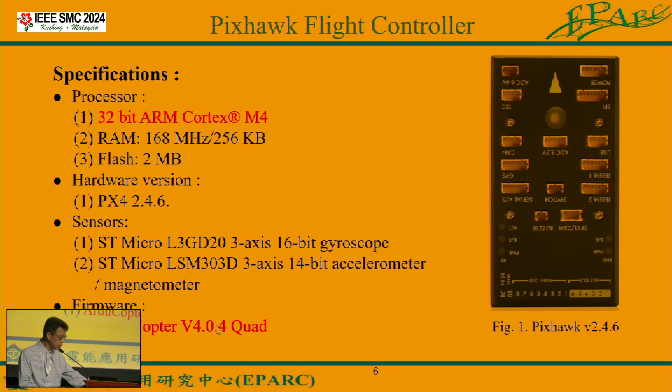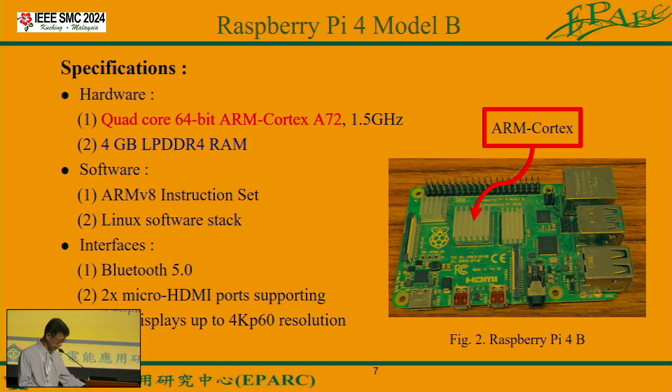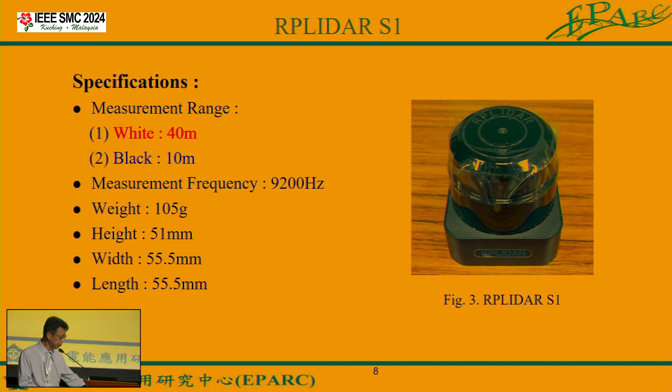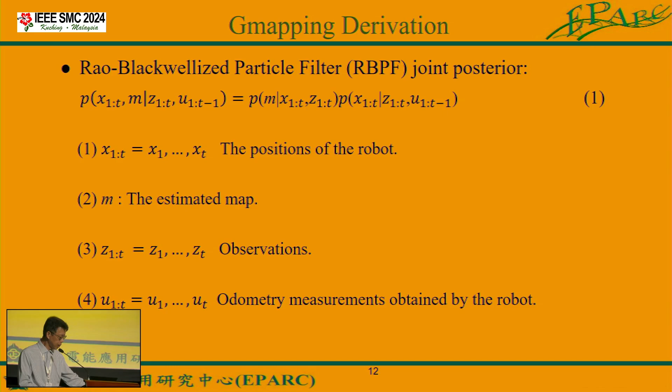In this algorithm, we have two models. The first one is the observation model. The second one is the motion model. In the motion model, we can use a particle filter to estimate the motion. Each particle represents a potential trajectory of the robot. In the observation model, the maps are built from the observations and the trajectory represented by the corresponding particle.

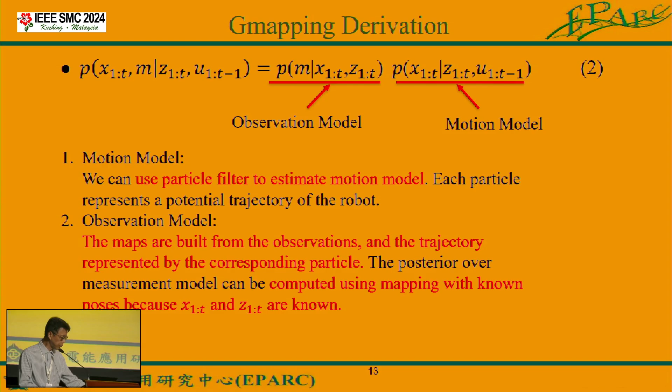The posterior over the measurement model can be computed using mapping with known poses. In general, the weighting of the proposal distribution is not the same as the target distribution. If the proposal distribution is the same as the target, the weightings of the particles are all equal.

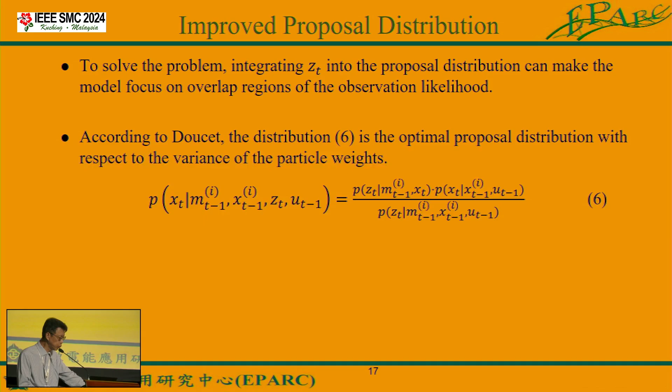To solve the problem, integrating z_t into the proposal distribution can make the model focus on overlap regions of the observation likelihood. Based on equations 5 and 6, we can obtain the computation of the weightings.

Next, we will show the scan matching algorithm. The scan matching algorithm is used for matching the data between two scans, and it helps SLAM figure out the real-world position and the scan from sensors. In G-mapping, the iterative closest point is used as the scan matching algorithm.

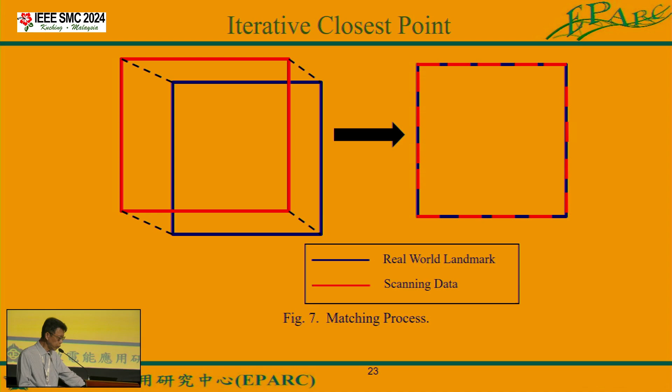This figure shows the matching process. The blue line shows the real-world landmark, and the red line shows the scanning data. The key idea of ICP is that if it knows the correct correspondence, the right relative rotation and translation can be computed in closed form. If the initial points q_i and p_i were not close enough, the result would be divergent.

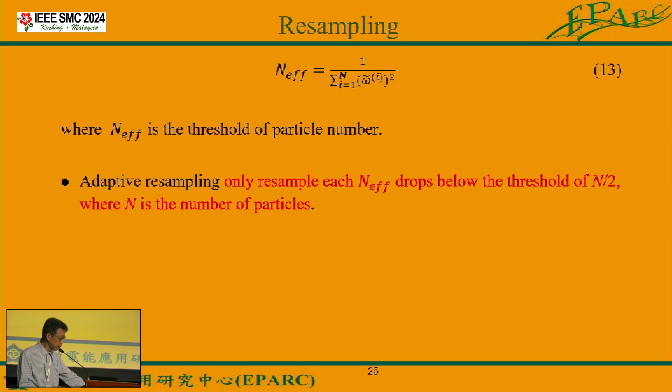Adaptive resampling only resamples when the effective particle number is below the threshold of n divided by 2, where n denotes the number of particles. For each particle, the corresponding map estimate of the observation model is computed based on the trajectory of that sample and the history of observations.

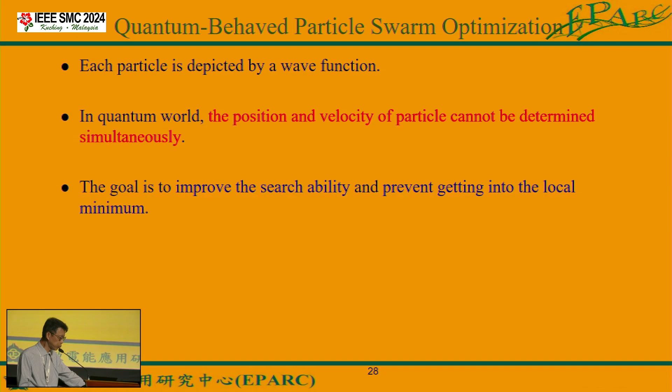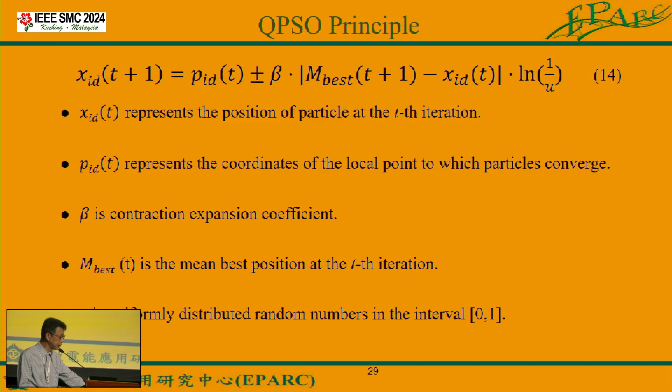Next, I will show you the quantum behaved particle swarm optimization idea. First, each particle is depicted by a wave function. In the quantum world, the position and the velocity of a particle cannot be determined simultaneously. The goal is to improve the search ability and prevent getting into local minima. Based on equation 14, we can obtain the position of the particle at the next time.

And in equation 15, m best denotes the mean best position at the t-th iteration. And equation 16 denotes the position of the particle, based on the local best position and the global best position combination.

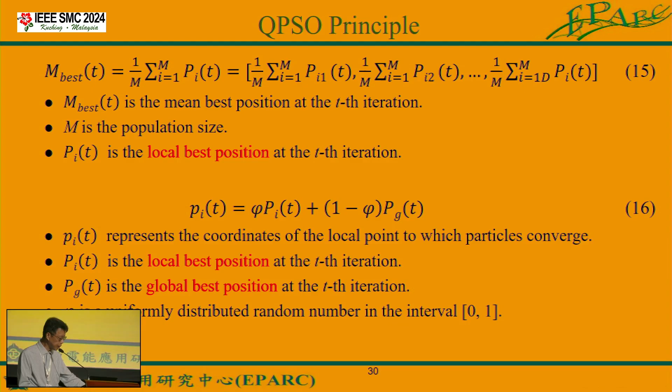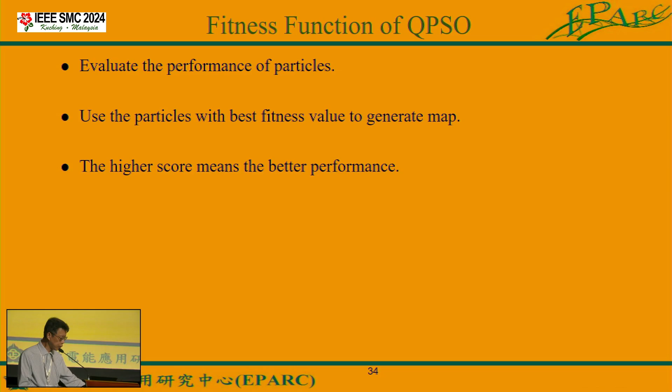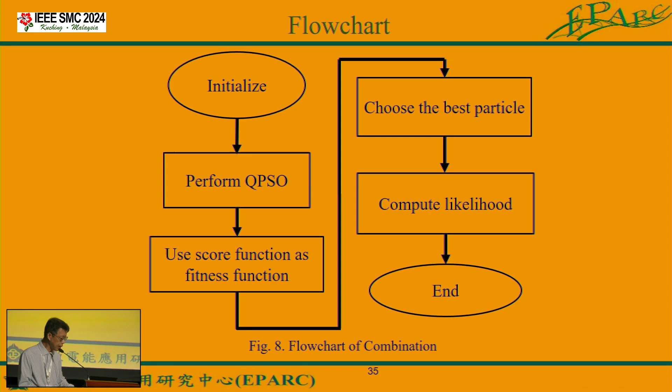And we define the fitness function of QPSO. So first, particles' performance will be evaluated, and we use the particles with best fitness to generate the map. The higher score means the better performance. So figure 8 shows a flow chart of the combination algorithms. We combine the QPSO and the G-mapping algorithms. And the next will be the G-mapping on ROS environment.

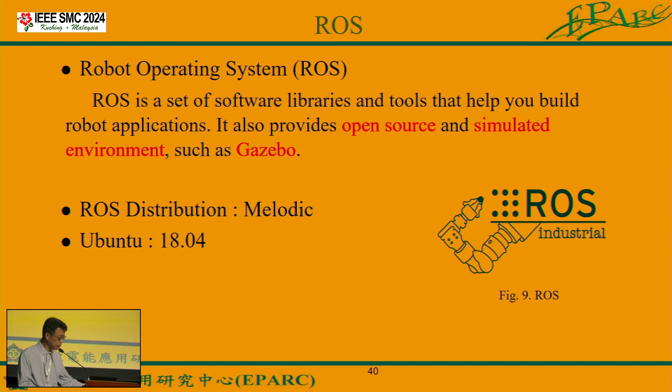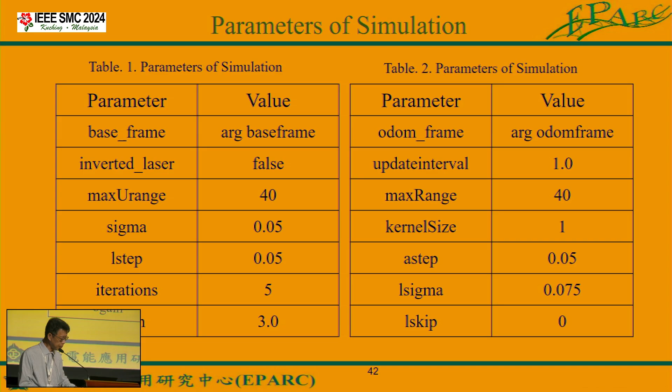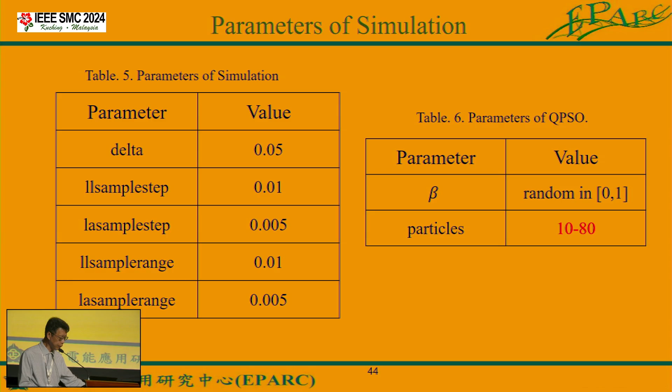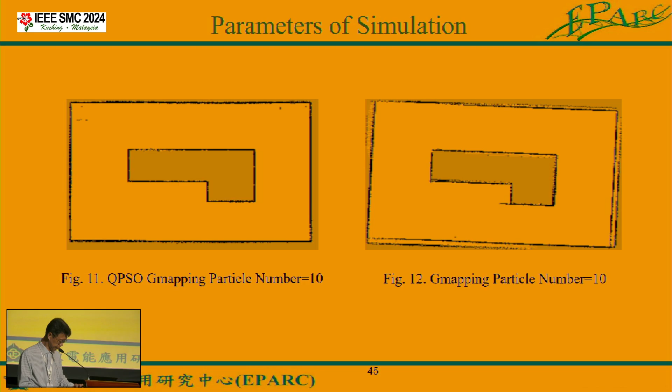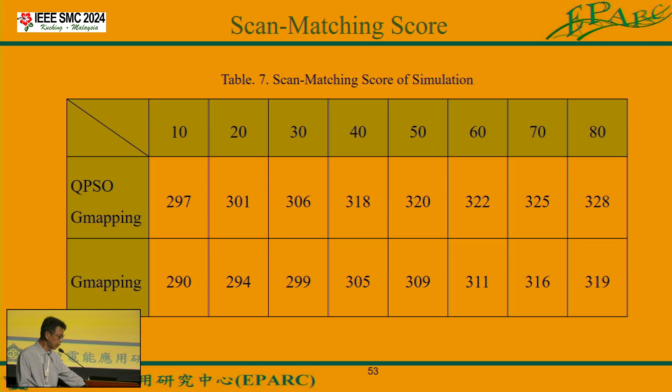So figure 11 and figure 12 will be the comparison between two SLAM results. Figure 11 shows the QPSO G-mapping result, and figure 12 shows the G-mapping with particle number equal to 10. So we can see that the result based on QPSO will be better than the result based on traditional G-mapping. We can see the similar result on different particle numbers. So table 7 lists the scan matching score of simulation. We can see that the QPSO G-mapping scores are always higher than those of traditional G-mapping.

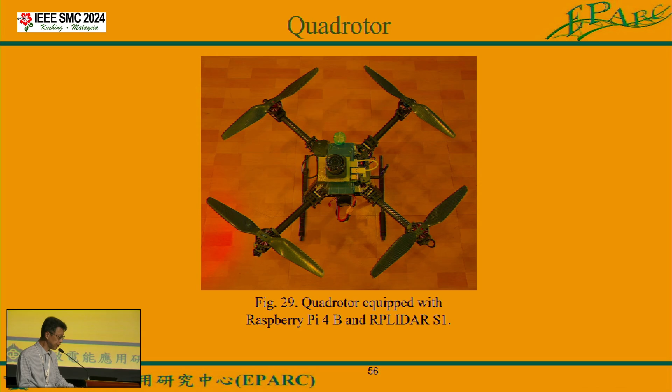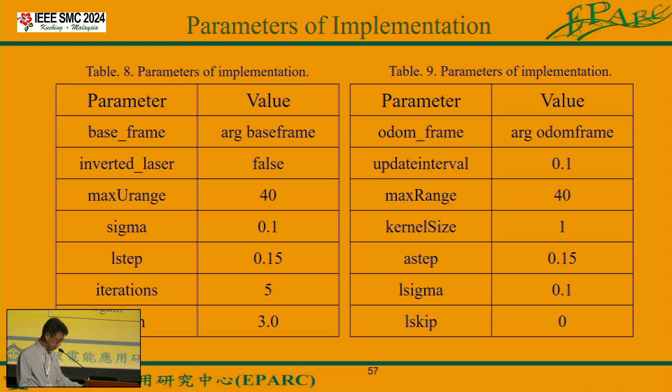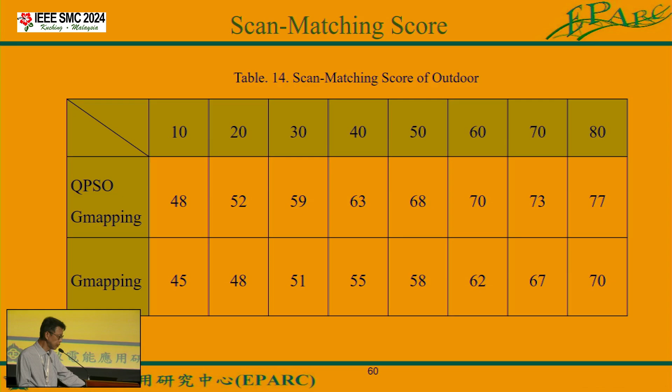And the next will be the experimental result. Here is the testing environment. So we use the quadrotor to do the SLAM by using QPSO and G-mapping. So table 8 and table 9 list the parameters of implementation. So table 14 lists the scan matching score. Again, we can see that no matter the number of particles, the QPSO G-mapping scores are always higher than the result of traditional G-mapping.

Next will be the conclusion. So the odometry is replaced by the laser scan matching, and the scan region of QPSO G-mapping is larger than the traditional G-mapping algorithm. And the tendency of QPSO G-mapping is more stable than the tendency of traditional G-mapping.

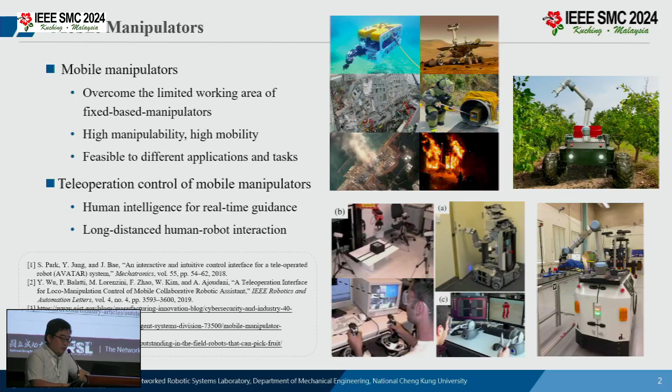And then this will be leading to the direction of so-called long-distance human-robot interaction. So the study of teleoperation on mobile manipulators has been developed for a while, but the main research direction is for the human to control the mobile base based on velocity-level control. In addition to that, some systems control the mobile base and robotic arm separately. For example, in the image on the left, you can see the human holding two local devices. One is controlling the mobile base, another one is controlling the robotic arm.

But the problem is that a mobile manipulator is a highly dynamic system. So the dynamic model of the arm and the mobile base should be combined together to develop the controller. So on the right-hand side, the video is the research from our previous work. The human can hold the controller to control the mobile platform and the robotic arm. But the problem is that we need to control them individually.

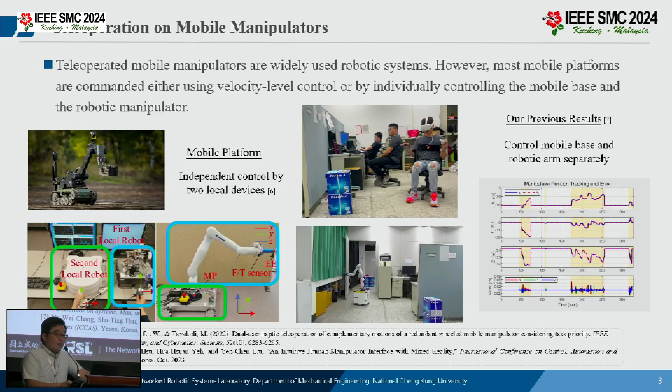So if we want the mobile manipulator to pick up some objects far away, we need to first control it by commanding the mobile base, and then when the robot is close enough, we switch to the manipulation mode. But because the workspace is large, and the human is not co-located with the robot, we don't know whether the robot is close enough to the object, to the workspace we want the robot to handle. So due to that, we want to extend to a different direction. That's the so-called whole body impedance control.

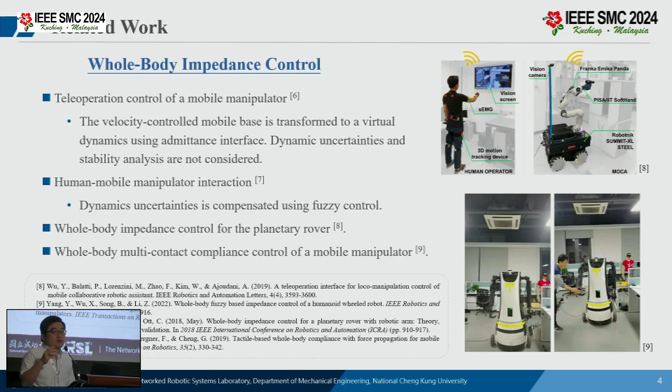Let me focus on whole body. We want to include the dynamics of the mobile base and the robotic arm to become the whole system. So while the human is commanding the end effector of the arm, the mobile base will accommodate the motion, moving around with it. Another one is impedance control. Because the robot might interact with some objects or even touch the wall in the remote environment, if we only control the position, the force from the robot to the wall or the object might be too large. So we need to consider both position and force. That leads to the so-called impedance control.

And then the motivation for this research is whole body impedance control of mobile manipulators. In previous research on impedance control, most assume that the dynamic model is well known, so all the parameters inside can be obtained. But when the robot is moving around, or we use a different robot, or the robot picks up an object, the dynamic system will be different. So in this research, we want to take into consideration the dynamic uncertainty.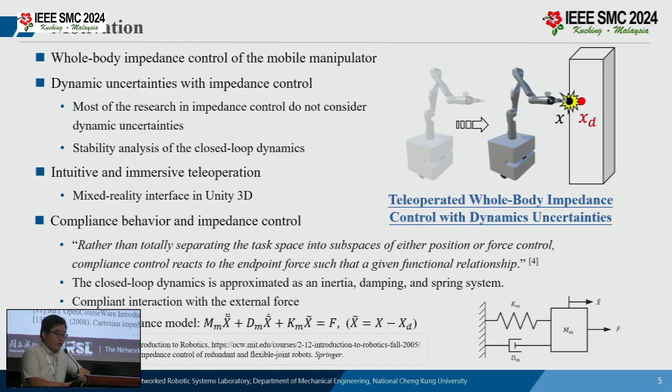And then for the human part, because the human is far from the robot, we need to provide enough information for the human to understand what's going on with the robot. So to provide such an intuitive and immersive teleoperation, we combine mixed reality, MR, in Unity 3D, so that the human can understand what's going on. So this is the main motivation for this research. And the objective, to conclude what I mentioned, is whole body control, compliance, dynamic uncertainty, and providing a better operation experience.

In addition to that, for the mobile manipulator, our control is on the end effector. So based on that, the whole system is a so-called redundant system. With a redundant system, we have more degrees of freedom in the null space. Then we can use those null space degrees of freedom to accomplish different kinds of tasks. This is called redundancy. So we will also consider that in this research.

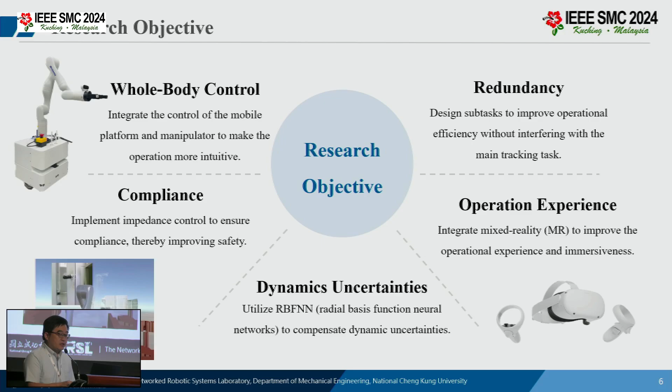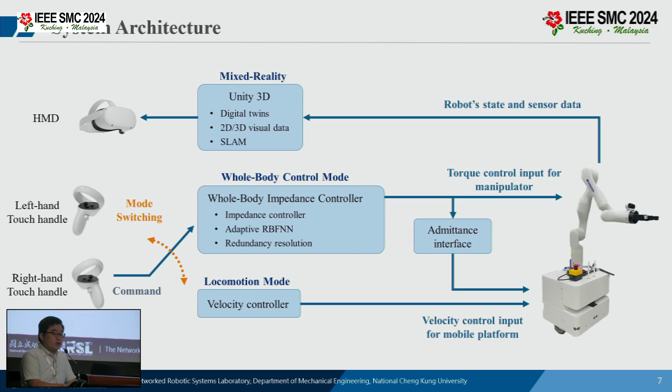In whole body control mode, the human controls the end effector of the mobile manipulator, and the configuration of the robotic arm or even the mobile platform will be autonomously running under the proposed controller. So in the robot part, we will feed the position, velocity, and also the image from the end effector to the head-mounted devices, so that the operator can see what's going on. Inside the system, the mobile base is a differential drive mobile robot, and the robotic arm we use here is a Kinova 7 degree of freedom arm.

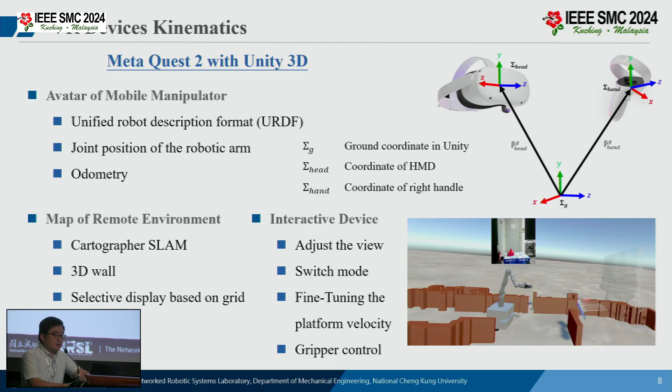The first one, we focus on the human part, because the human uses head-mounted devices and two touch handles. So we first need to get the position command from the two hands so that we can use the hand motion to control the mobile robot. So we use the coordinates on the head-mounted devices and the coordinates on the two touch handles to generate the desired position and the desired orientation.

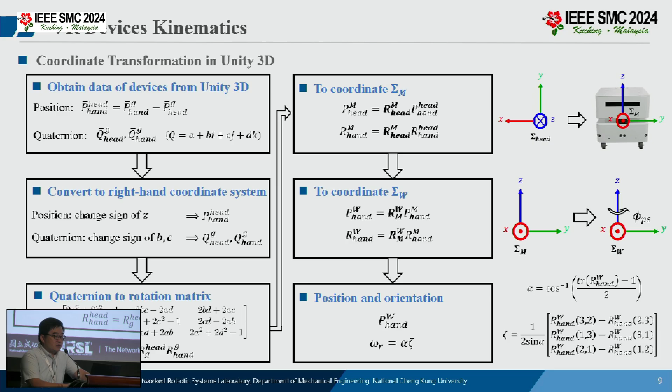So this is the coordinate transformation we use in Unity 3D, because we will get the first position, and by using the quaternion, we can get the position of the end effector, which will be the position of the touch controller. And another one is for the orientation. I'm not going into the detail here, but from this structure, we can get the desired position and the desired orientation from the human.

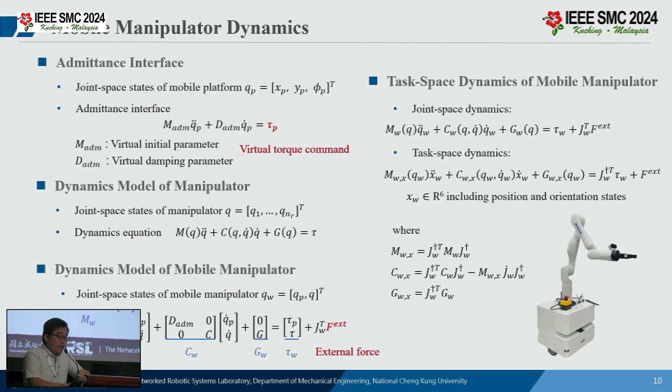And for the M matrix, which is the inertia matrix, the centrifugal force matrix, or the gravitational force G, we can use the corresponding Jacobian matrix to obtain them. After we have the task space dynamics, the next one is to propose the whole body impedance control. We assume that the human is using the touch to generate the desired command, desired position, desired orientation. This is denoted by XD. Based on XD and the robot states, we can have the task space velocity and position tracking error.

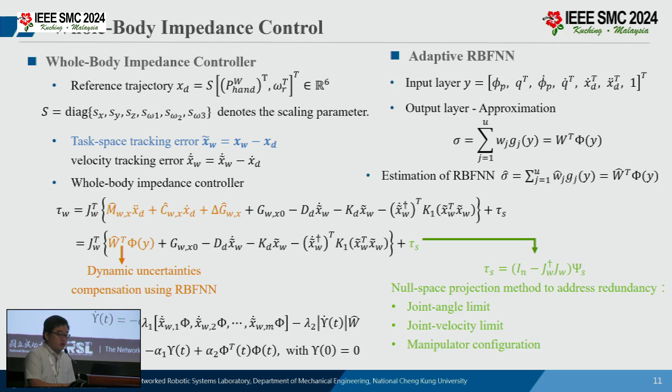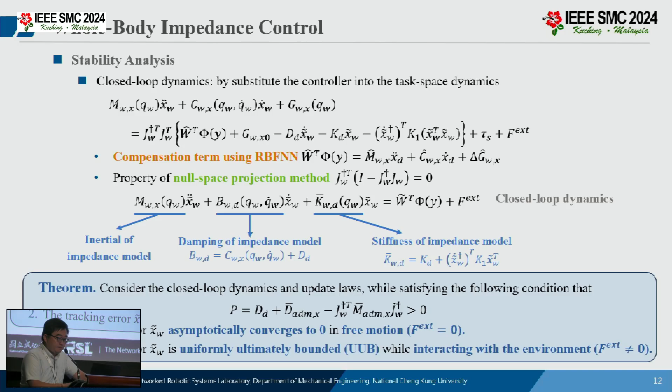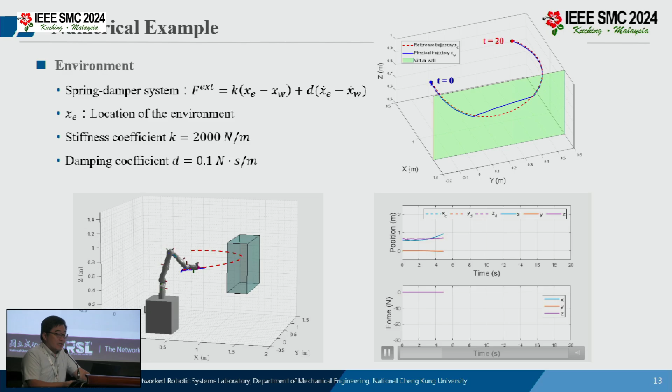So you can see that during the gray area, which is the duration that the arm touched the wall, there will be a force. The force will push the robot backward so that the robot will not push too hard into the wall. And this is the performance from our designed impedance control.

And then in addition to the numerical example, we also conduct experiments. In this experiment, we command the mobile robot to open the door. In the previous research, we controlled the mobile base and the robotic arm separately. But in this research, we first switch to locomotion mode, controlling the mobile base to get close to the door. And then after that, we switch to the whole body control mode.

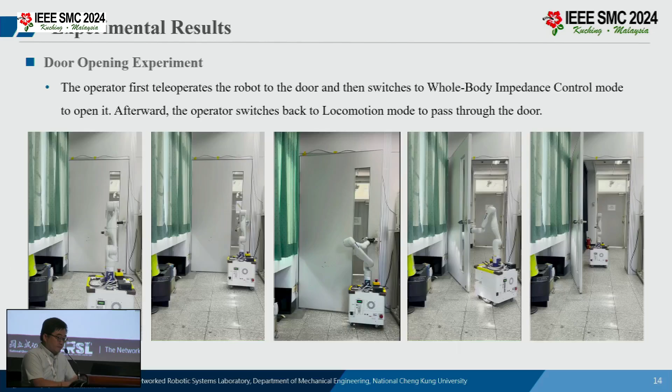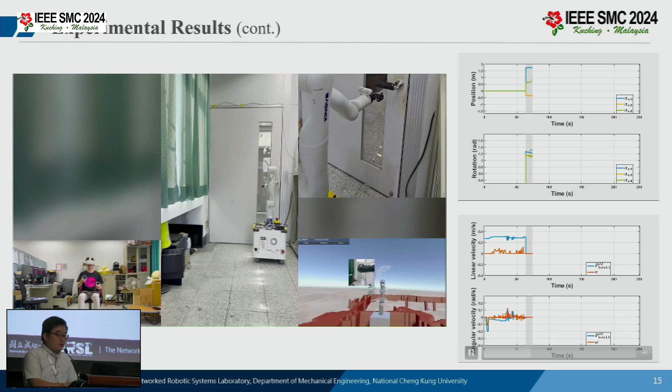So in whole body control mode, the human only concentrates on the end effector, and the mobile base and robotic arm will move autonomously. And this is a video. You can see that this is locomotion mode. And then when the mobile manipulator is close enough, we switch to whole body control mode. In the two figures on the right, the gray area is the whole body control mode.

In the whole body control mode, the human only controls the end effector, but the mobile base will move around following the human command. Then after the door is open, we can switch back to locomotion mode. So the arm is fixed, and the human only needs to focus on controlling the mobile base.

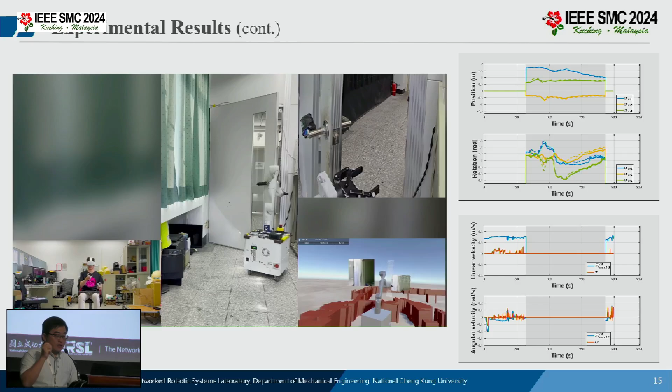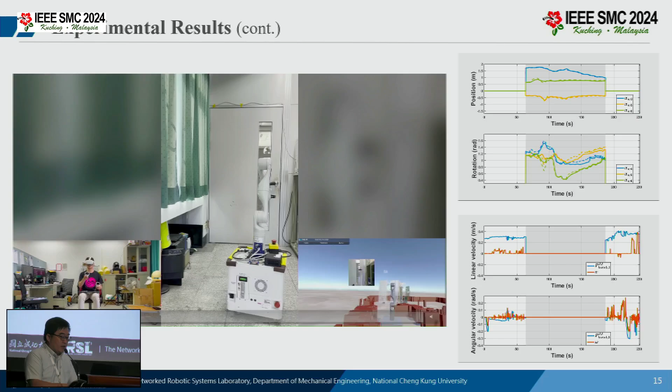Okay, so in the video on the left, you can also see that this part is the image that the human can see. So the human can see the environment, can see the mobile robot, and also can see what's going on.

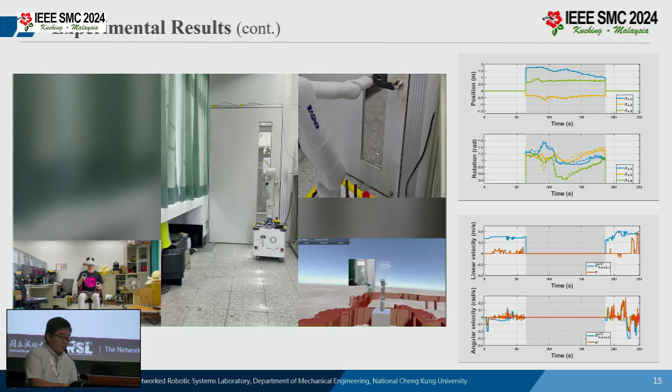So in this research, we propose a mobile manipulator whole body impedance control taking into account the dynamic uncertainty, with the use of a radial basis function neural network to compensate for that. In addition to that, we also propose redundancy-based control so that the mobile manipulator can use its null-space degrees of freedom to conduct different tasks. And we also completed experiments on human-robot interaction.

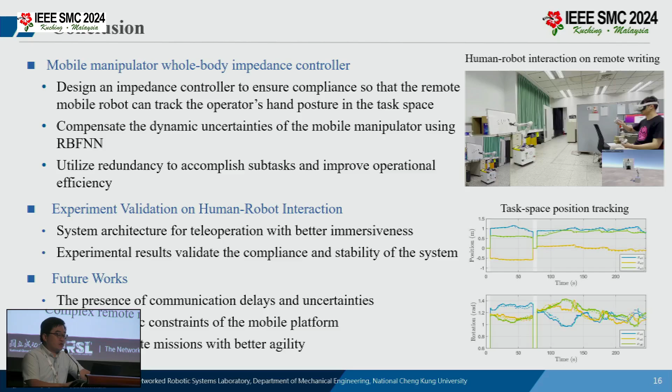In this research, we assume there's no delay, but when the robot interacts with the human, the communication part will become a problem. So in the future, we will take into consideration the time delay or unreliability issues in the communication network. And in the proposed controller, we only focus on the holonomic constraint; there's no non-holonomic constraint. So we will extend that and look for opportunities for complex remote missions in the future.